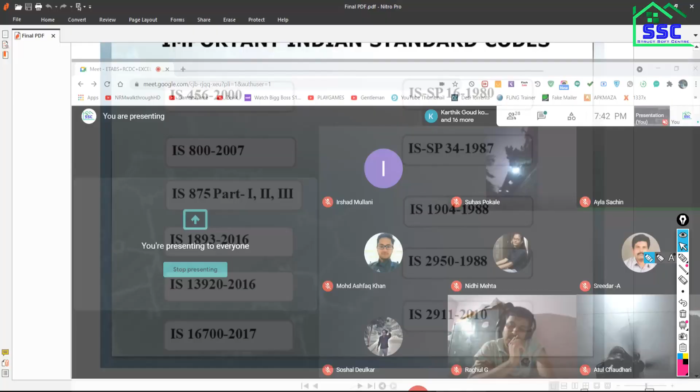If you have thorough knowledge about these design codes, you will definitely design your structure to be economical as well as stable. Unless you have this knowledge, you will not be able to make an effective, stable and economical design. Okay, so this is the requirement. Now come back. What is the fourth requirement?

I have a good command over the software. I have a good knowledge of the basic concepts. I also have knowledge of the design codes and their important clauses. Now the fourth is the most important: experience. Experience means how many real-life projects you have dealt with and designed. Every individual project will have its unique difficulty, and dealing with that unique difficulty is nothing but experience.

These four pillars are very important to keep in mind to get command over all these points, to become a good structural engineer and design any kind of structure. Keeping in mind all these requirements and industrial requirements, we have created this training course. ETABS is a well-known software in the market, used for the design of RCC structures, steel structures, medium to high-rise structures. The requirement of RCDC software we'll discuss later.

Some structural elements are designed by design consultancies and firms using Excel sheets, so that's also included in this course. Everything here we are going to deal with in light of the requirements of the IS codes. Your software will be covered, and your basic knowledge, everything from scratch I'll try to explain, so the basic structural concepts will be cleared. If you forgot them, don't worry. The second part will be covered.

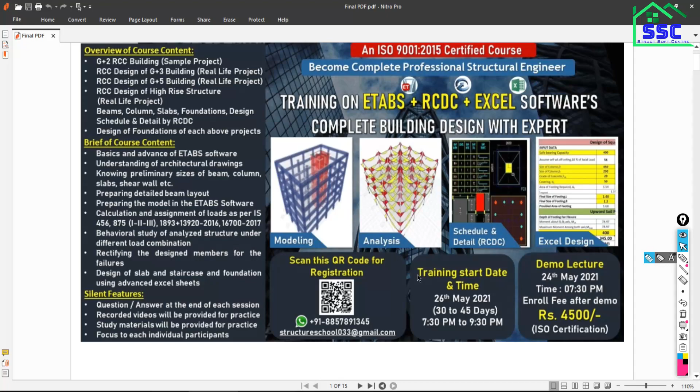Then we will take high-rise structures also, where we will discuss all the advanced things. So this is what you are going to get from this training. Is that clear? Okay.

Excuse me, sir. Some students are waiting. Please don't ask any question right now. At the end, I'll try to take every question. Okay? Sorry, sir. Actually, some of the students are waiting to join.

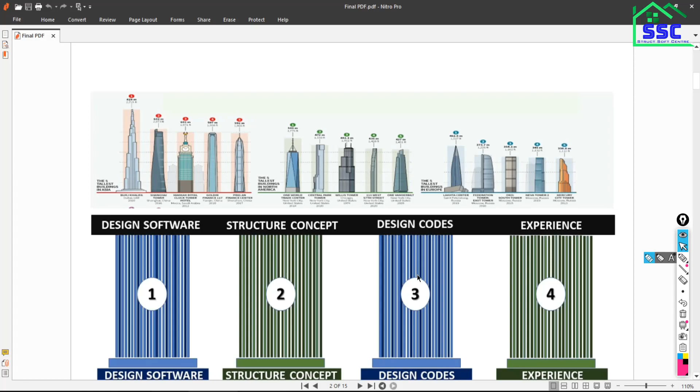Okay, wait. So these are all important parameters you have to keep in mind to become a good structural engineer. Now the next point is that for completion of any project, as a structural engineer and as a beginner, it is important to follow the correct design steps.

It is important to follow correct design steps. As you know, in the flow of completion of any project, the owner will come to the architect, then the architect will plan the land and prepare the architectural plan, and that architectural plan will come to the structural engineer, and then the structural engineer's work will start. The first responsibility of the structural engineer is to read the architectural drawing carefully.

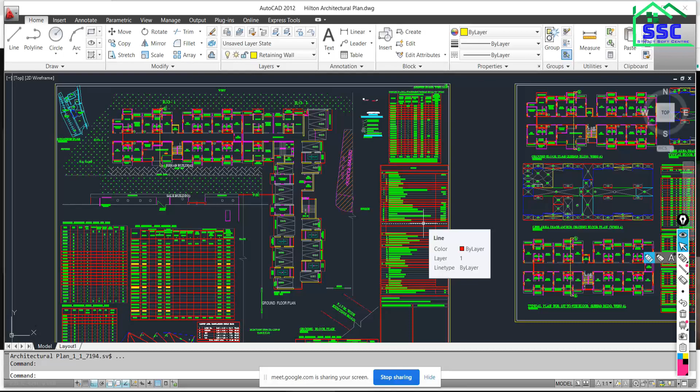Many types of architectural drawing will be there. Okay, like this kind of architectural drawing you will get from the architect. So your first responsibility is to understand the architectural drawing. Unless you understand the architectural drawing, you will not be able to proceed to the next step. You will not be able to position your column, orient your column, prepare your beam layout, prepare your center line plan, or go for any next step.

Okay, so you have to understand the architectural drawing, and by understanding the architectural drawing you will be able to prepare all the things that are required for the next step. Is that clear? Once you have understood all the architectural drawings, then you proceed to the next step. What is the next step? You have to decide the preliminary sizes of the different structural elements.

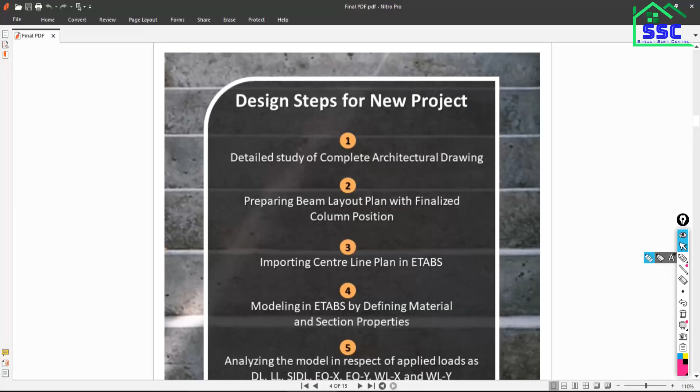After understanding the architectural drawing, your next step is what? You have to position the column, decide the orientation of the column, and decide the preliminary sizes of different structural elements. All these decisions you have to make for the preparation of the beam layout. In this training we will cover all these points.

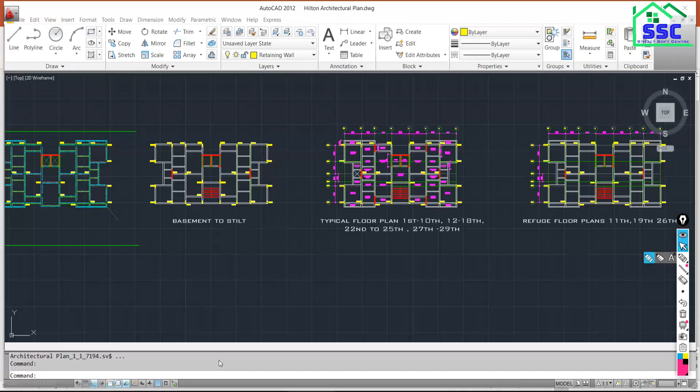What should be the size of the column? That's very important. What should be the orientation of the column? What should be the position of the column? Because the stability of your structure mainly depends on the positioning of the column. And the economy of the structure also depends on the positioning and orientation of the column.

That's a very important point. Most designers don't know, and in their training they don't cover this point, how the position and orientation of the column will influence the economy of your design. And your stability also depends on the position and orientation of the column. See, if one beam fails, it does not mean that your entire structure is going to fail. But if one column fails, there is a possibility that your entire structure is going to fail. Am I right or wrong?

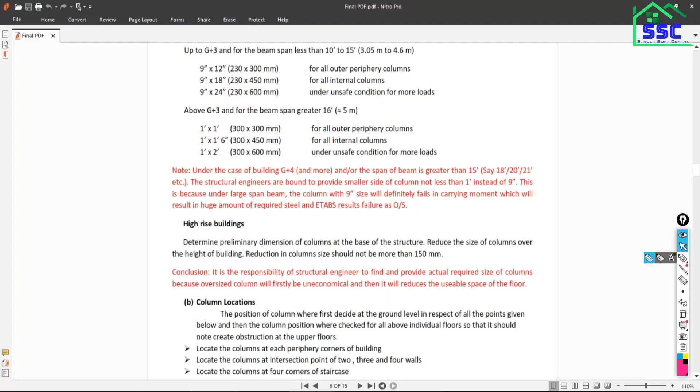Hello? Yes, sir. Exactly. So that's why the stability of your structure entirely depends on your columns and shear walls. If a shear wall is there, then column and shear wall both are very important to maintain the stability of your structure. All these points we will cover in this training. Then how to position your beams, the orientation of beams, sizes of the beams, everything we are trying to cover in this training.

Some advanced Excel sheets are there that will help you find the preliminary sizes. This is actually the preliminary size. It is not the final design size. Some of you may think, how can we decide the size before design? So it is not the actual size, it is the preliminary size. In ETABS software, before modeling, you have to define some sections. You have to define some important things to go for the next step.

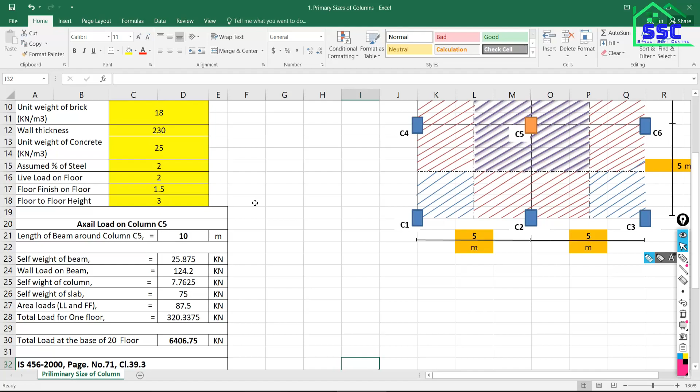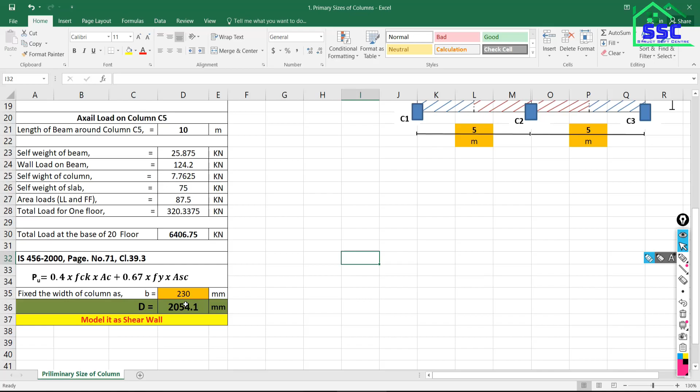Although the sizes and reinforcement will definitely depend on the design, some preliminary sizes we have to decide, and different consultants practice with different options. One option is finding the preliminary sizes using Excel sheets. By some changes we will get finally what size is required for the column. Width will be 230 and how much depth is required, that we can decide by these preliminary sizes from the Excel sheets.

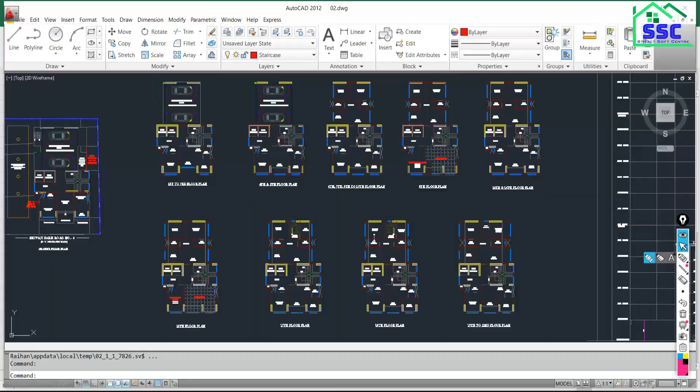So going through all these points, sizes, orientation, position and all, we have to prepare the final beam layout like this. See, this is the beam layout. What does beam layout mean? If you don't have knowledge, we will discuss that point also. What will be present in your beam layout? The beam number, beam position, column number, slab positioning and slab marking, everything will be present in your beam layout.

This beam layout has to be sent to site for execution, for reference in positioning the columns and beams. So that is your beam layout. This beam layout should be very correct as per your architectural drawing, and over that architectural drawing you have to prepare this beam layout for all the floors.

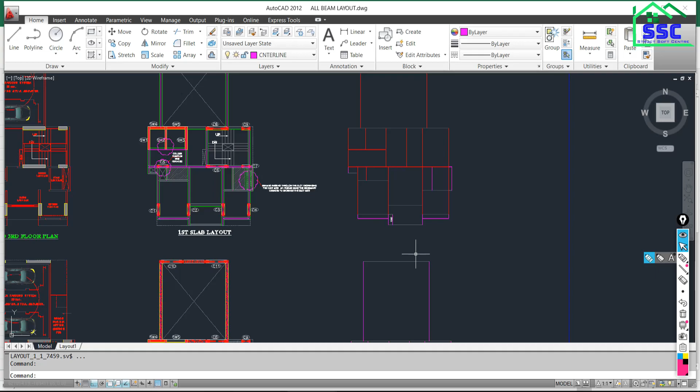Once you prepare this beam layout, then finally you have to prepare the center line plan. How to prepare this center line plan is a very important point which we will discuss in this training. After getting this center line plan, our work will be completed with CAD. Till the preparation of the center line plan, our work is with the CAD file, working over the architecture plan.

Now after getting this center line plan, we have to move into the ETABS software. So just come back to the ETABS software.

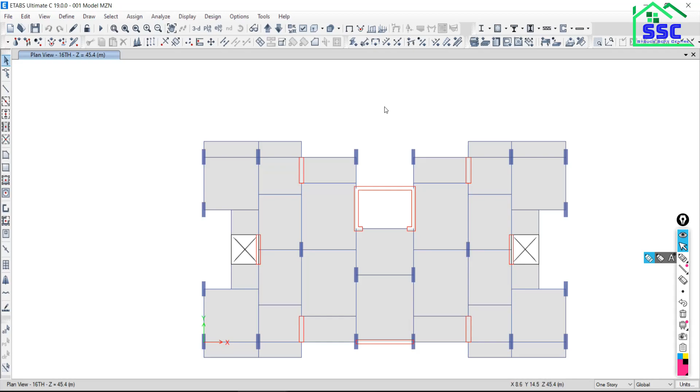So the first thing is you have to prepare the grid lines in the ETABS software. Without having these grid lines, it is very difficult to go for the modeling of different structural elements and to create your entire model. So we should have some reference line, that is nothing but the grid lines.

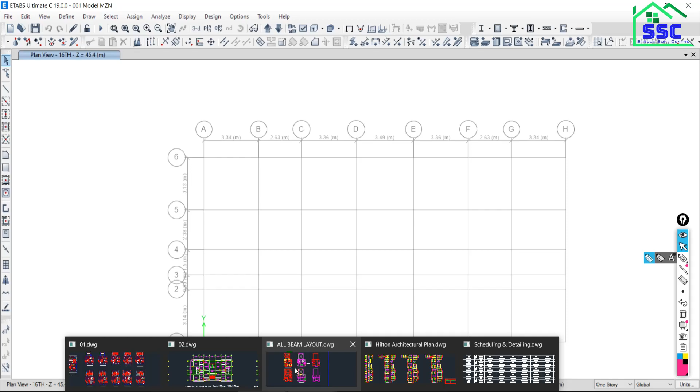There are different methods of preparing these grid lines in ETABS, like the OPM method, offset point method, and import-export method. If the architecture plan and center line plan are very complicated, you can directly export that file from CAD and import it into ETABS. But if the drawing is simple, you can directly create the grid lines by default within ETABS itself. So these three options are there to prepare grid lines.

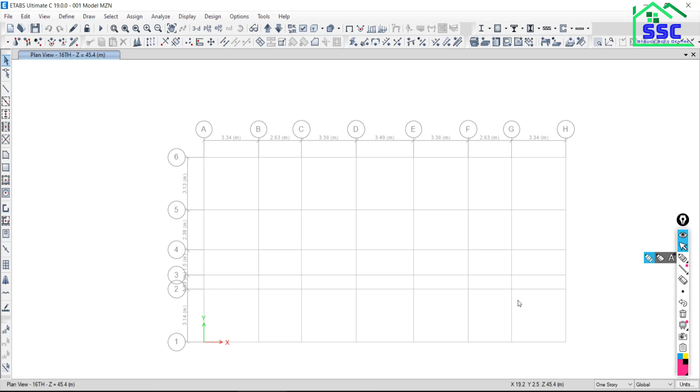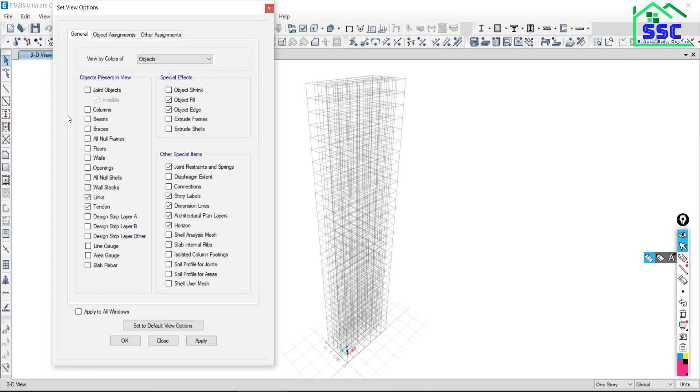Once you complete the grid lines, the next responsibility is to model the column. How to model the column, what different commands are there, what advanced commands are there to model the column - you have to finally model the columns like this. Modeling of the column involves many things which we will discuss in detail in our training.

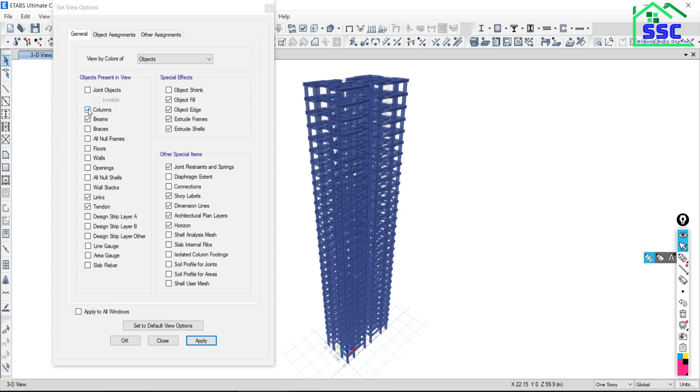Then the next point is you have to model the beams, from base to top. How to model the beams, how to reposition the beams, how to model curved beams, how to model inclined beams - everything we will discuss.

Then you have to model the slabs also, how to model slabs of different shapes and different configurations. That also we are trying to cover in this training, so you will get a command of modeling any kind of structure.

See, analysis will be same, design will be same, scheduling will be same, and detailing will be same for every project. But what is different is the architectural plan, and accordingly you have to model your structure and create your model in the software. So everything will be same, only the different thing is the modeling. That's why we are focusing mainly on modeling in the first section of our training.

How to model different kinds of columns, different kinds of beams, different kinds of slabs - all these things we are trying to cover in our first section. Now in the second section, what is the next step for preparing the model?

You should have knowledge about different commands of the ETABS software. The next step is defining different important things in the software - what should be the section sizes, what materials you are going to use, like M20 grade, FE415, FE500 grade, section properties, and all this you have to define in the ETABS software.

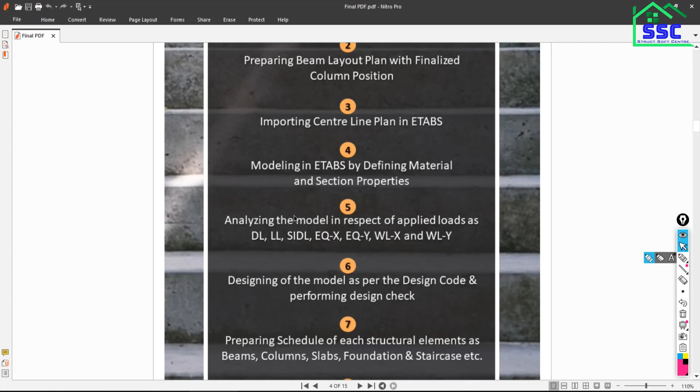In ETABS software, three things are there. How many things are there? Three things are there. Actually, the step is there - before the step something, after the step something.

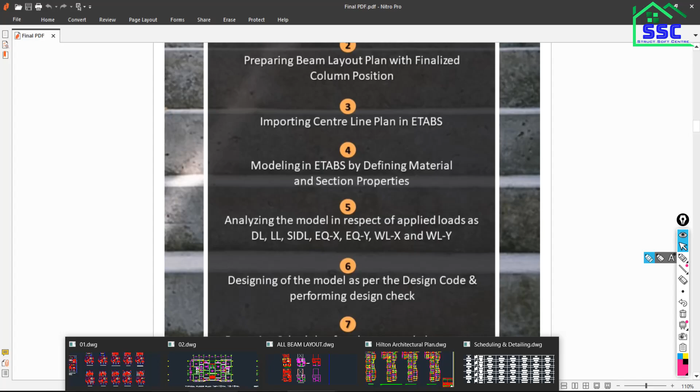What it means is that to perform any step, before the step there is a setting, and after the step there is a check. Before modeling you have to define some important things - you have to define the material properties, the section properties, and many other things, and then you proceed for the modeling.

You can create your model in the software like this. So once the model gets ready, it doesn't mean that your model is correct.

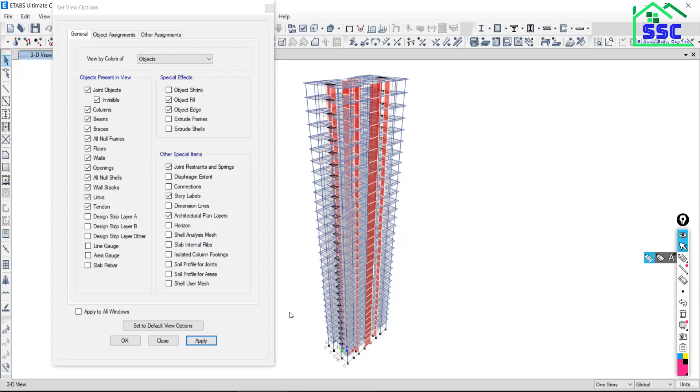It doesn't mean that your model is correct. What you need to do is check your model for any modeling errors or warnings. It's your responsibility, because if your model is wrong, your analysis will be wrong. If your analysis is wrong, your design will be wrong, and everything in the next step will be wrong. So your responsibility is to check whether your model is right or wrong.

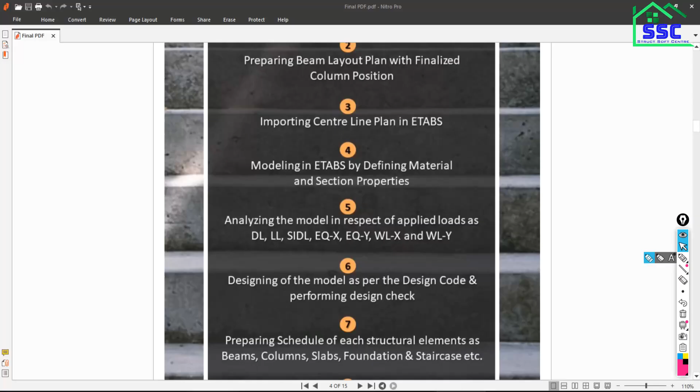That's a very important and challenging job, to overcome these errors and warnings. Without resolving all these warnings and errors, you can't proceed to the next step. As I told you, if the model is wrong, all the results in the next steps will definitely be wrong.

So up to this point you work in the ETABS software. Now for the next step, you proceed for the analysis. As I told you, before any step you have to do something, and after the step you have to check whether it was executed right or wrong.

So before analysis, you have to define the different load combinations. That's a very important point. If you are designing a building only for gravitational load, there will be only 2 load combinations - service load combination and factor load combination.

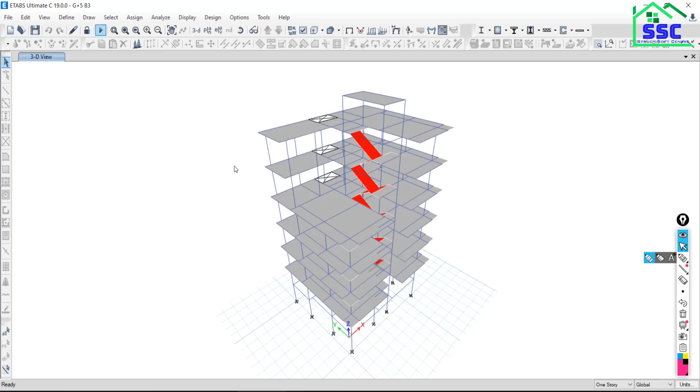The most important thing is to know whether the analysis is right or wrong. We can't blindly trust the software. Software is just a tool to make your work easy, to complete your work within a short period of time. Am I right or wrong? Hello? Yes sir. Yeah, okay.

Yes sir, so if you are giving wrong input, you will definitely get wrong output. No doubt we are human beings, we make mistakes. Everyone can make mistakes, but if you made a mistake during modeling, and after the analysis you are getting results not as per your expectation...

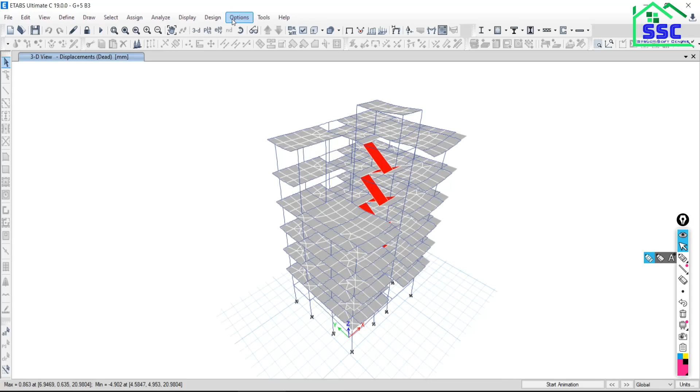That means I want the beam to be simply supported. But after the analysis, I am getting the result like this. So it should click in my mind that I did the mistake somewhere. Am I right or wrong? Yes, sir.

Okay, so that's why you should have a basic knowledge of structural behavior under loading. Then only you can perform correctly with the software, and you can rectify the software and rectify yourself if you did the mistake. Software is correct, but it works with the given input. If the given input is right, then the result will be right. If given input is wrong, definitely output will be wrong.

So how to see the bending moment diagram, how to see the shear force diagram, what axis consideration - M33 axis, M22 axis - where to see the shear force, where to see the bending moment diagram, how to see the reactions, how to see the deformation of the slab. Then, if you are talking about the slab, what is the difference between the shell element and the membrane? No one discusses this difference - how the membrane element behaves, how the shell element behaves, what is a thin shell, what is a thick shell. So all these things are very important to know to work with the ETABS software.

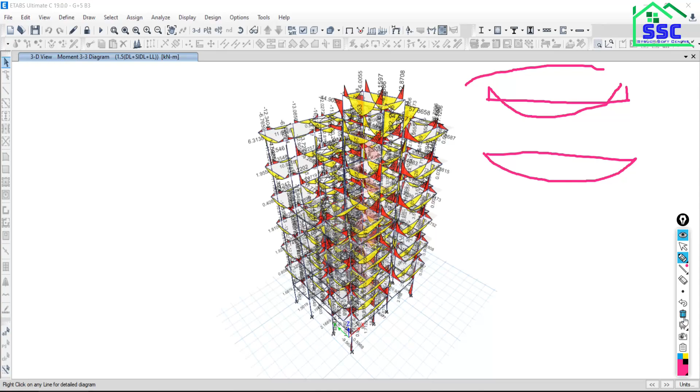Is that clear to all of you? Yes, sir. Okay, now after having this analysis result, what is the next step?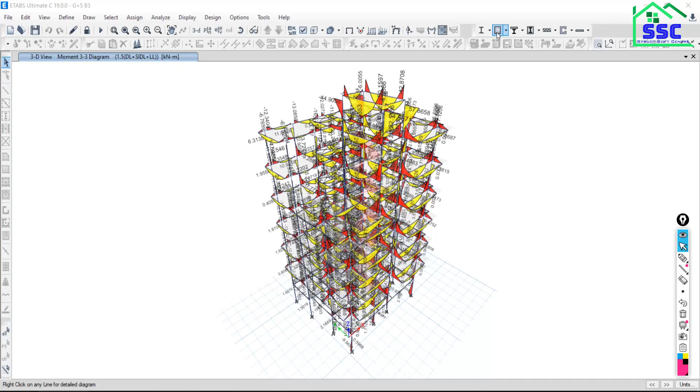You have to check whether the analysis has been done correctly or not - it means whether the load has been transferred correctly or not. So one step is there, and how to do that I will try to cover in the complete training. Now after that you have to design your structure, and many things have to be discussed before designing the structure, but I am not going to discuss that. Just click over design, so your design will begin and your design will be completed.

So like this, the design result will be in front of you, and all these values that you are getting here is actually the requirement of the reinforcement. So how to read this design report and design results, that's very important.

Very important. And after designing, a check is there - all the members passing the design check or not. After design, what step is there? You have to check whether the members are passing the design check or not.

If some member is failing in the design, you have to find what is actually the reason. Suppose one column is failing here, so one column is not passing the design check - what is actually the reason? Suppose, just for example, this column, the failed column will be present with red color, and this column is failing the design, so you have to find out. It does not mean you just go and increase the section size - that's not the only reason.

Many training centers will tell you to just increase the section size and this column will pass. Am I right or wrong? Hello. Yes, sir, normally it is said.

Yes, but that's not a solution. Being a structural engineer, we should have knowledge of why this column is failing. It's not only that the section size is less as per requirement - no doubt that's one reason, but what is the theory behind this? What is the concept behind this?

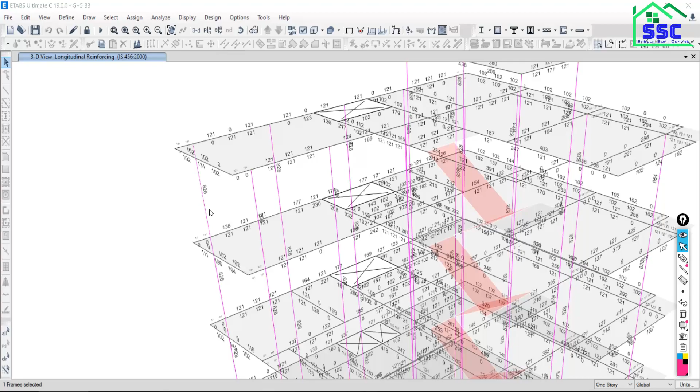So why are we restricting the percentage? There is a detailed discussion of detailing and scheduling, which I will try to cover in detail in this training. There are many things we have to discuss before the design, during the design, and after the design. After having the design result, we have to proceed to scheduling and detailing.

Being a structural engineer, we know that this section size is passing the design check and this reinforcement is enough. So one question to all of you: can I send this model file to site directly for site execution? No, sir. No. So we have to prepare the schedule and detail.

Can anyone tell me in short what is the definition of scheduling, why we are preparing the schedule, and what is the meaning of the schedule? The quality of steel. For site execution. My previous batch students, don't answer; I am asking the newcomers. Construction stage. Quality of steel, sir. In general, I am asking what is the meaning of schedule?

Simple. Yes, Nidhi Mehta. Arranging, controlling, and optimizing work. You are correct on your level, but I'm expecting it in general, in simple language. To organize, sir. Okay, listen to me. What is meant by the schedule? So the meaning is what?

If you are actually going to design one beam manually, at least 3 to 5 pages are required to complete the design. Am I right or wrong? Yes, sir. So the overall design will require too many pages; it will be a booklet. So we can't send the detailed design report to site. As a structural engineer, for ease of work on site, we have to send the summary of the design, and that summary is nothing but the scheduling. Is that clear to all of you?

Yes, sir. And to execute effectively, we have to prepare the detailing also, which will help on-site engineers and laborers: where to cut the bars, where to bend the bars, where to lap the bars. So have you got the meaning of scheduling and detailing? Yes, sir. Very good. Now the next step.

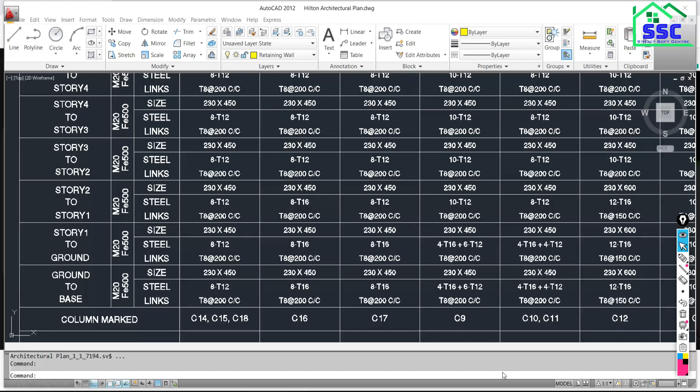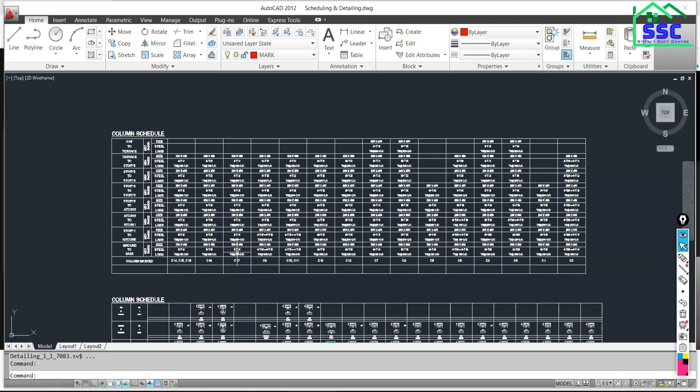So this kind of schedule you have to prepare, and I will take you through in detail how to prepare it. We will take a structure, prepare the model, go to analysis, go to design, and prepare the schedule manually. Many softwares are there, like RCDC, and we will have a detailed discussion about RCDC later. But that RCDC work, first we will do manually.

Software you can learn, but how to do it manually is actually very important. So first I will cover all the things manually: how to prepare the column schedule from the design results of the ETABS software. So this kind of schedule you have to prepare.

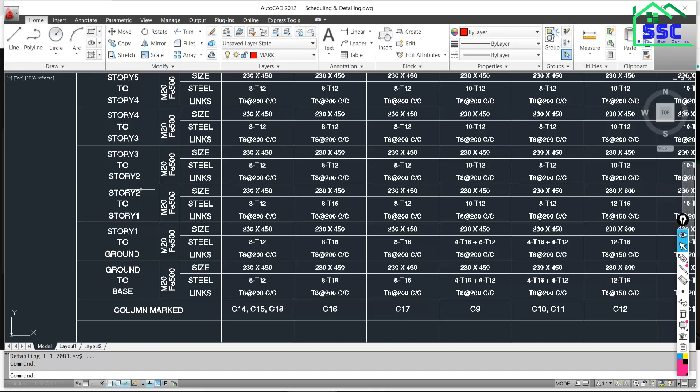At the base to ground level, how much reinforcement is required, ground to first level, first to second, like this, how many number of bars, what the diameter of bar, and how much shear reinforcement is required. All these things I will try to cover in the part of scheduling and detailing. So this is the schedule of your column.

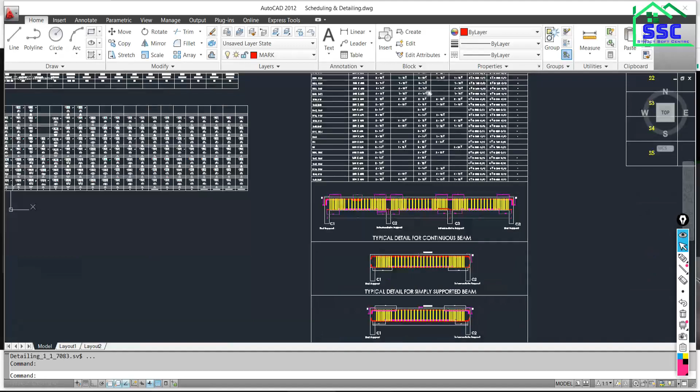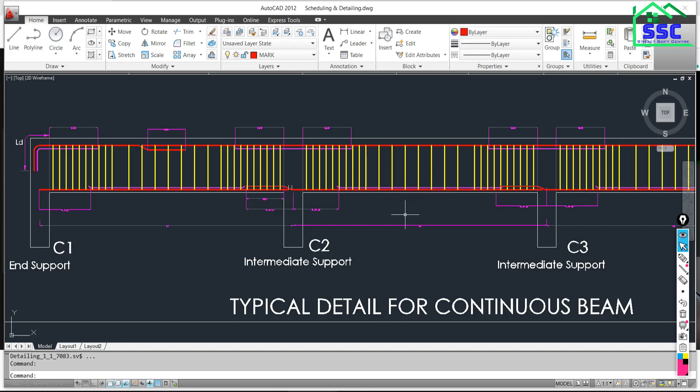Then how to prepare the schedule of the beam in respect of the design result of the ETABS software. And then how to position your reinforcement, where there will be the curtailment, where will be the lapping in respect of SP34. What is the purpose of SP34? What is the necessity of SP34? SP34 is very, very important, very useful for the structural engineer to learn scheduling and detailing. So that we are also trying to cover in this training.

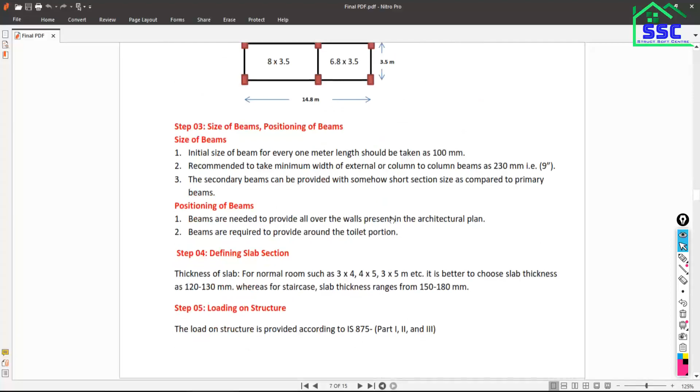Then we have to prepare the schedule of the slab. Everything we are trying to cover in this training. Now finally, after having this, we will go to prepare the reports. See, these kind of reports we have to send on site for the site execution. The column schedule will be there, column typical detail will be there, and all the details will be there. And finally this sheet we have to send on site, and with the help of these design sheets, site construction is going on.

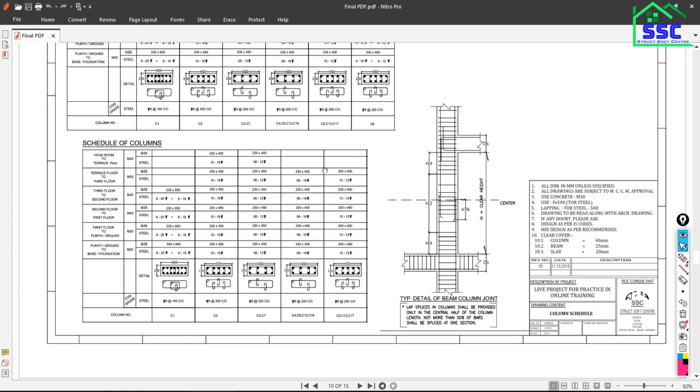This kind of schedule reports you have to send on site, design sheets. Is that clear to all of you?

Fine, sir. Very fine, sir.

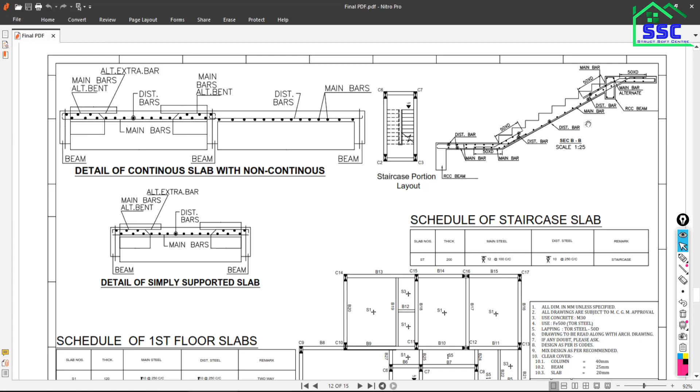Okay, so how to design the slabs, how to design the staircase, everything we can't design in the ETABS software. So the consultants will take the help of Excel sheets for the scheduling purpose and also for the designing purpose. It is the way of working of different persons, but some similarities are there.

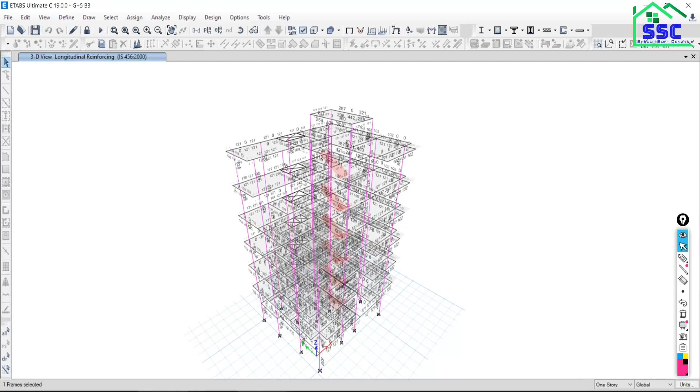Most of the consultants are designing the structure, beams and columns and some important structural elements, through the ETABS software, and some important structural elements like slabs, staircase and all using advanced Excel sheets. So in this training we are also going to follow that procedure. We also have some important Excel sheets for the designing of these structural elements like slabs, and see, designing of one-way slab is there.

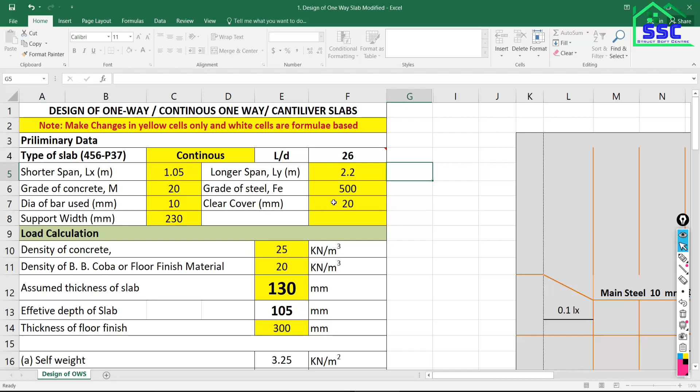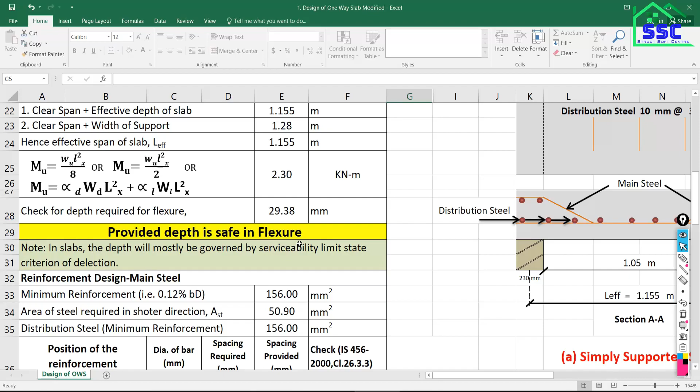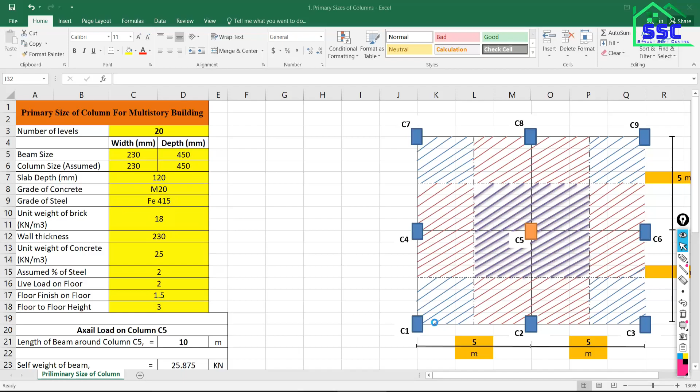Okay, like this. So this slab design sheet will give you a detailed report of the design. You just have to put some basic information from the architecture plan, and then you will finally get the design report. So this is for what? This is for designing of one-way slab. There is another sheet for the design of the two-way slab, a very effective and very useful sheet. So you will give all the details for the designing of the two-way slab.

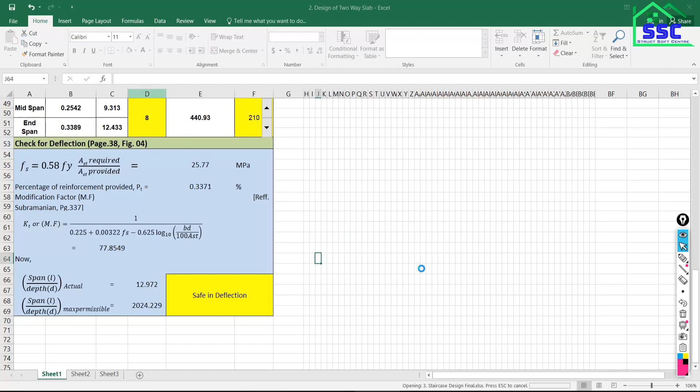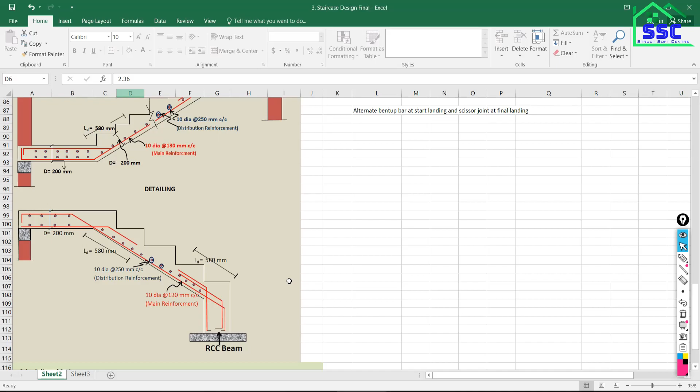Then we also have a design sheet for the design of staircase. Advanced Excel sheet for the design of a staircase, which will give you schedule and detail of the design, everything. So finally you will get the schedule like this. Finally you will get the detail like this. So these advanced Excel sheets for some important structural elements we are going to use in this training.

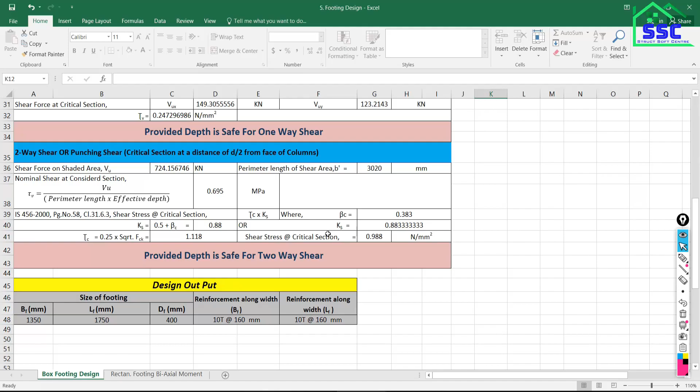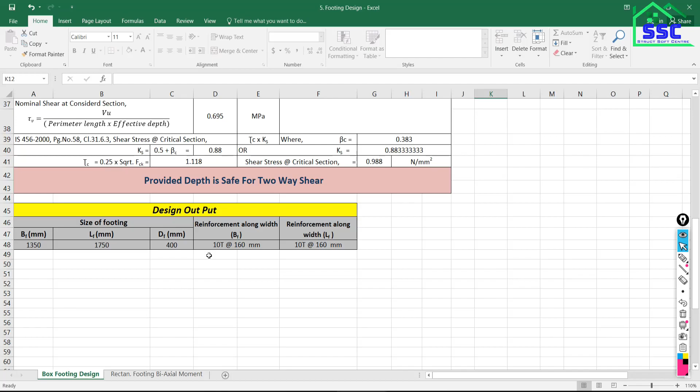Foundation sheet is there like this. So these sheets we will use for the designing of the foundation, so that you will finally get what width of the foundation is required, what length of foundation is required, what depth of foundation is required, how much reinforcement along the width, along the depth, everything we will get as a design output from this sheet. And these all are practical sheets. You can use all these sheets for your practical purpose working as a structural engineer.

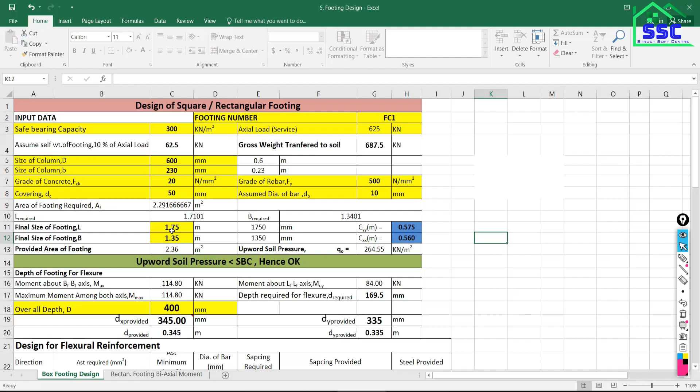So definitely after completion of this medium rise structure, you will be able to design any medium rise structure on your own. This much confidence you will get after the completion of this training. After having the discussion of all this for the medium rise structure, we will move in this training to the high rise structure. There we have to discuss many important things. Okay, before going to this high rise, it's visible to all of you?

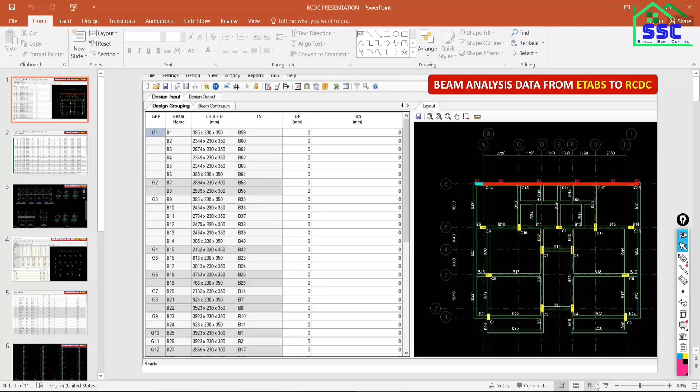Hello? Yes, sir. Yeah. Yes, sir.

So see, as you know, one work is there, that is scheduling and detailing. That scheduling and detailing we can do manually. But suppose, as a beginner or at the intermediate experience, you require one day for preparing the schedule and detail for any project. That work you can complete with the help of the RCDC software within 10 to 15 minutes.

Hello? Yes, sir. In what minutes you will complete the work? Sir. Hello, can you tell me? 15 minutes, sir. 15 minutes.

The one day work you can complete within 10 to 15 minutes using this RCDC software, and that is the greatness of this software. So what actually you need to do? This RCDC software is not the analysis software. It is the design, scheduling and detailing software. This software actually requires the analysis report. If you give the analysis report to this software, it will give you design results, design output, and schedule and detail everything.

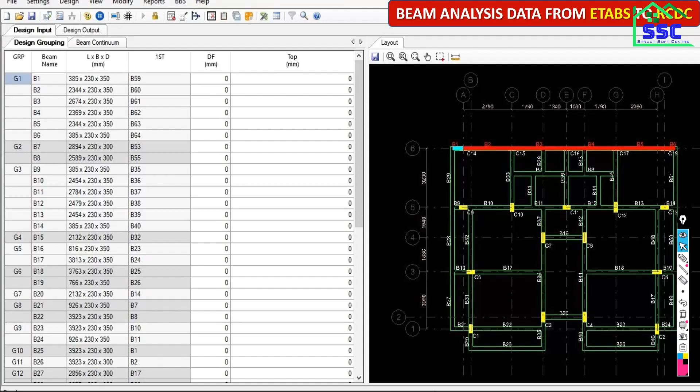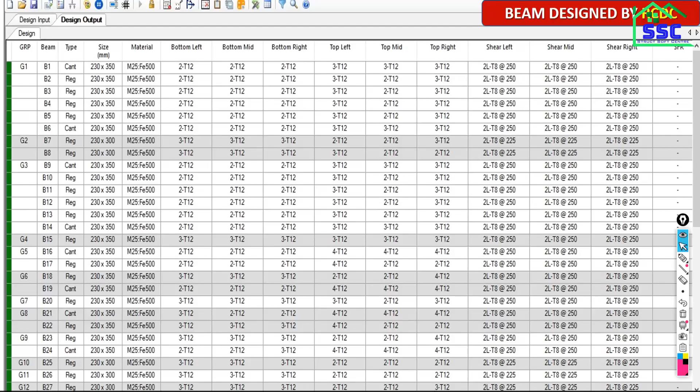Okay, so the analysis report we will take from the ETABS software, and then we will import it in RCDC software, and then we can proceed. So this is the imported analysis report of the beam from ETABS to RCDC. This is the design report: how much reinforcement is required at the bottom left, at the mid, right, top, bottom, shear reinforcement, what section size is required, how much material and what material is required, with the basic settings. Some basic settings and understanding is important. I will discuss each and everything, so we will definitely learn how to use this software. And finally you will get the design report like this.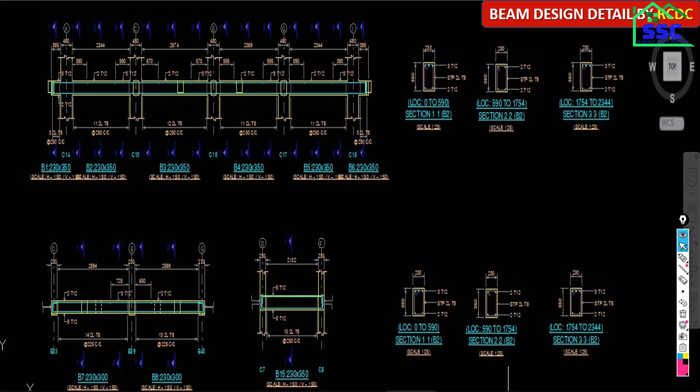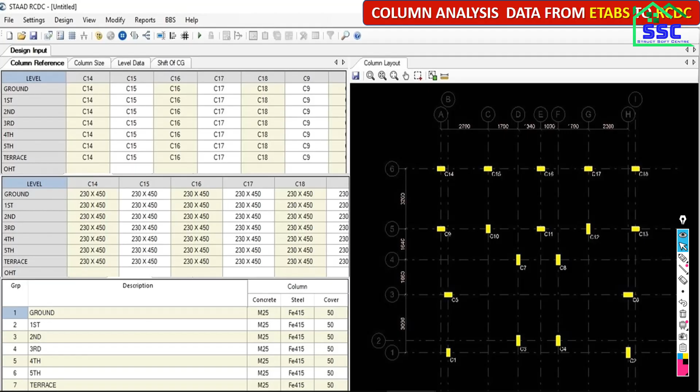So the beam result you will get. Then the same thing for the columns. Having imported the ETABS analysis result to the RCDC software, you have to perform some basic settings, and then you will get the design result like this: how much percentage of reinforcement is required, how much bar is required, how much shear reinforcement is required, and finally you will get the design report and detailing like this over the height of your structure. That also we are going to discuss in this training.

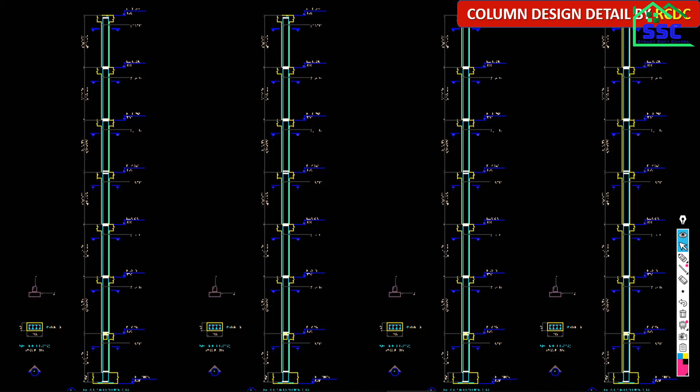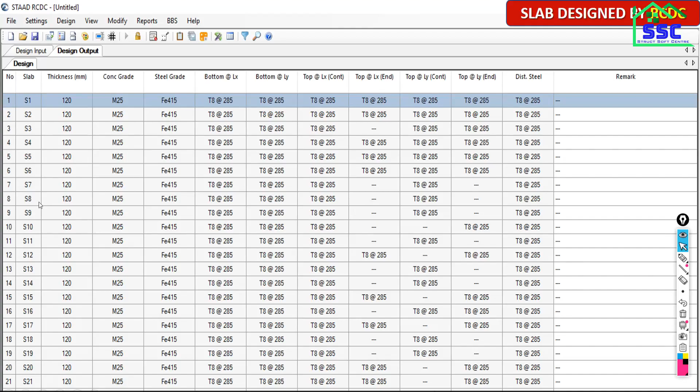Same thing you can do for the slabs also. So this kind of slab is there. We have a slab analysis report we have to import here, and then finally we have to design the slab. Using this RCDC software, in a single click you can design a number of slabs. Some basic things you have to do in the settings, and some basic parameters you have to change according to your requirement, and finally your design result will be available like this. How much reinforcement is required at the bottom, top, and shear, everything will be available here. And finally you will get the design detail like this.

And then finally you can design your foundation also, and the foundation design report you will get like this. All the things you can complete using this ETABS RCDC software. So that's actually the greatness and importance of this RCDC software, and it is being used in most of the consultancies, and most of the independent consultants are also using this RCDC software to work in less time. Is that clear to all of you?

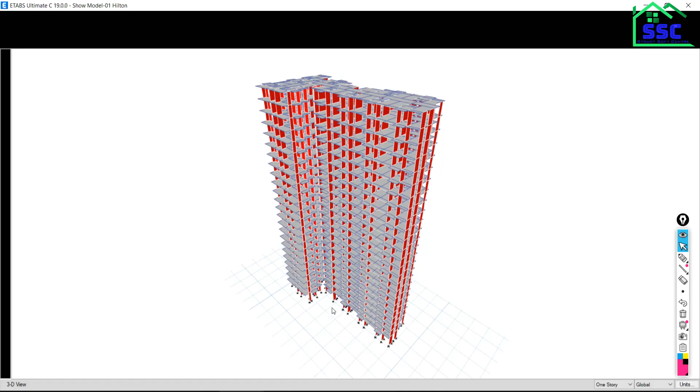After having all this discussion, then we'll move to the advanced topic. We will move to some high-rise structures, how to model those high-rise structures. Some important things we will discuss in this high-rise structure, this kind of complicated structure, how to model that. All things we will cover in this training.

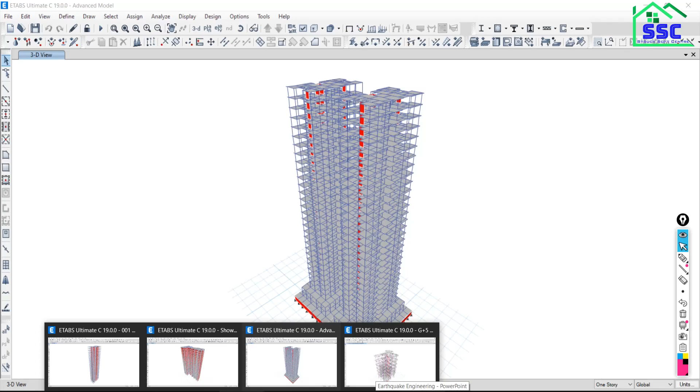What does it mean by the property modifier? Okay, so some important things: what does it mean by the in-plan geometry of the structure, what does it mean by an orthogonal building, what does it mean by a non-orthogonal building, what does it mean by stiffness, strength, ductility for a high-rise structure which is subjected to lateral load. Especially in high-rise structures we have to deal with the lateral loads.

In a medium-rise structure there is no problem with the lateral load, but if the height of the structure is going to increase, the influence of the wind load and the earthquake load is going to increase. At that time you have to discuss in-plan geometry, stiffness, strength, ductility. So a detailed discussion will be there.

Then earthquake loading and methods of analysis for the high-rise structure. Suppose the earthquake loading is there, so what are the different methods? Static, dynamic, in static, linear, non-linear, and when to perform static, when to perform dynamic, which building is medium rise, which building is high rise, which building is low rise. So many controversies are there, and all those controversies we are trying to resolve in this training.

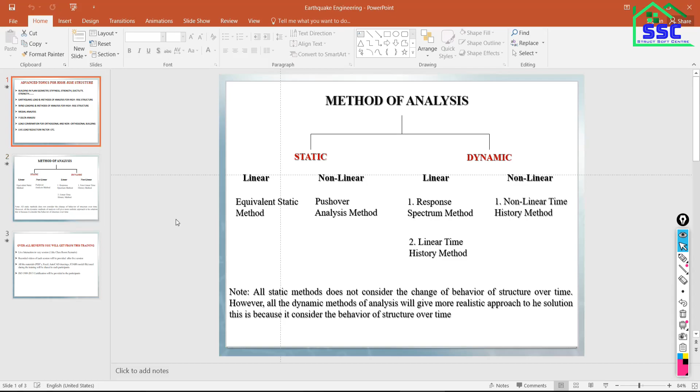When to perform the linear analysis, when to perform the non-linear analysis, when to perform the static, when to perform the dynamic in respect of the earthquake loading. All the things I am trying to cover in this training. Then what are the different ways of assigning the wind loading in the ETABS software? And what are the different methods of analysis for the high-rise structure under the wind loading? What does it mean by the modal analysis?

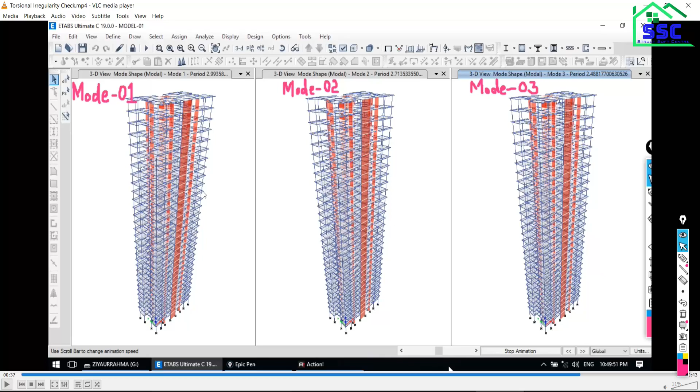And your third mode, if it is having torsion, there is no problem, that is acceptable. But your first mode and second mode should be free from torsion. So how to avoid this torsion, and on what factors this torsion depends? That is a very, very interesting point. Here the time is not allowing me to discuss each and everything. Okay, so a very important discussion is there, so that you will get the result of your structure as per the requirement: your first mode and second mode being torsion free, and your third mode having torsion, which is acceptable.

Okay, so all these things we are trying to cover in the advanced topic for the high-rise structure. Then why it is needed to perform the P-delta analysis, what does it mean by P-delta analysis, how to perform the P-delta analysis, everything I will try to cover. And some discussion we had about the load combination. Then what does it mean by the live load reduction factor, why it is needed. So all these things we are trying to cover in high-rise structures. That will be an interesting experience for you.

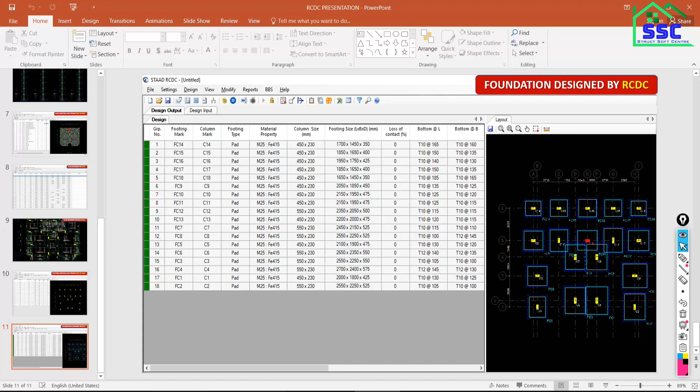Okay. What is RCDC, separate software, sir? Sorry. RCDC is a separate software. This is a separate software. Yes. Okay. Hello. Yes, sir. Okay, nice. Sir, one more doubt. Do you conduct training like this for design of steel structures also? I mean, after completing RCC. Yes. That is in our plan. Definitely. Sir, how to get this software? We will share everything. How to get this software, how to install this software, everything, support we will provide.